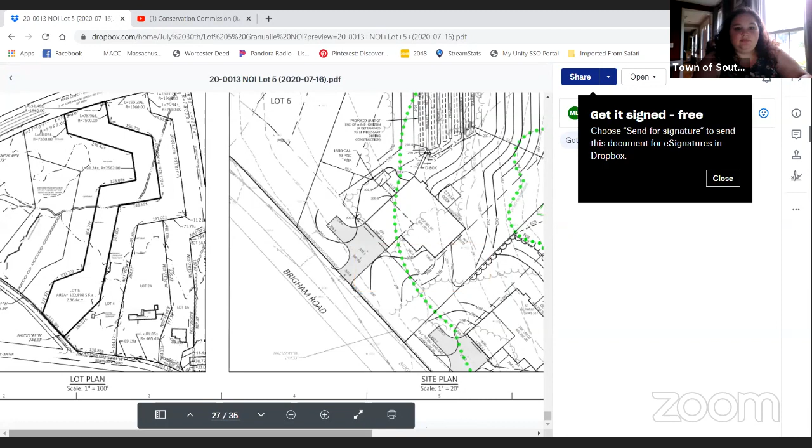I guess in the meantime, do the commissioners have any questions? This is kind of in line with the other two lots that we've been talking about.

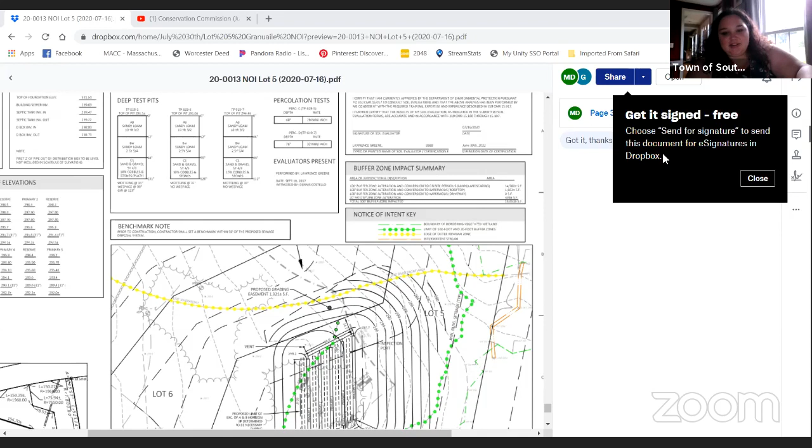While we're waiting for Wayne to unmute, Matt, do you want to give us some insight, update, and your review of this? So, as Melissa said, this is fairly consistent with the other two lots they've proposed. I did review it, had a few fairly minor comments.

Melissa, can you bring the plan up so we can see the site a little bit more? Yeah, that's better. And I don't know, I think they had submitted a revised plan. Is this the revised plan, Melissa, or is this the original plan? This might be the original one.

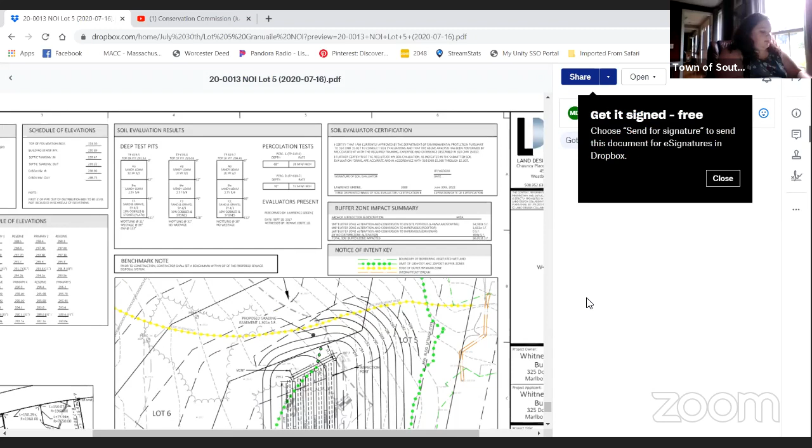Okay, so one of my comments was basically on the location of the septic system. And this doesn't seem to show it, so maybe this is a different one. They had the proposed leach field closer to the wetland boundary and the reserve area, yeah, that one, and the reserve area away from the wetland.

I guess my question was, could the reserve area be left closer to the wetland and basically undisturbed? I don't know, Russ, you can probably answer that better than I can - I don't know if the reserve area has to be cleared and graded, or if it can just be left. But that was one of my questions, was just kind of flip-flopping that to potentially allow pulling that disturbance away from the buffer zone, at least for the initial construction.

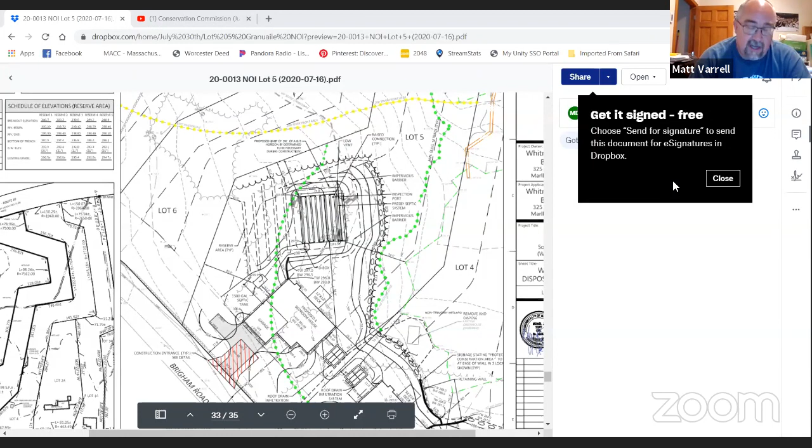They are proposing a roof drain infiltration system, like they added on some of the other lots. And I just had a comment asking for a detail on what the system was going to look like and any calculations as far as the sizing.

They are proposing, similar to the other lots, sort of a boulder wall to prevent lawn creep that's shown on the plan, but didn't really have a note calling out exactly what it was. So I thought, just to make sure everybody was on the same page, that it have a little note attached to it. That was about it.

There's no, as far as I know, no DEP file number yet for it. So we'd have to wait on that, and potentially some minor plan revisions based on my comments. So that was about it.

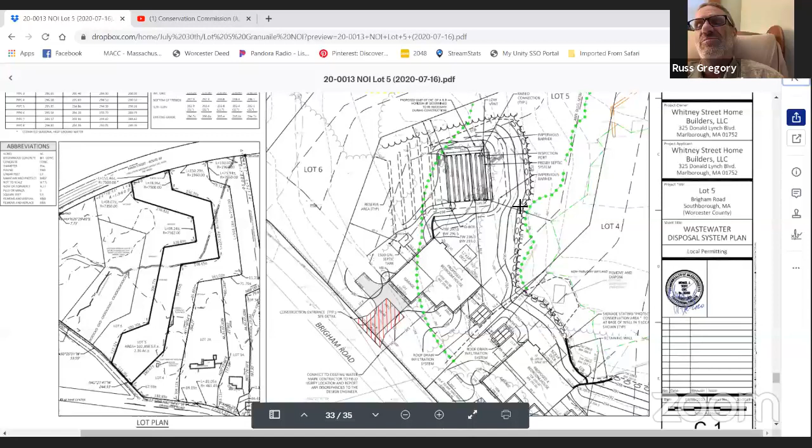So Matt, I'm not able to answer your question. I kind of suggest maybe we talk to the Board of Health and just throw that out there. Why can't we use the upland part first?

Yeah, that was my thought. It just seemed, why build it close to the wetland if you could build it further away? And if someday you need to build it closer, if it fails, then so be it. But, well, the other scenario as well is on a repair, sometimes you just have to dig it out and put it back where it was. So why can't we use the upland area?

I know I did get a DEP number this morning, but Wayne did have some edits to make, so he was asking to continue this until the next meeting, and that's one of the questions we can bring up that he can address in the meantime.

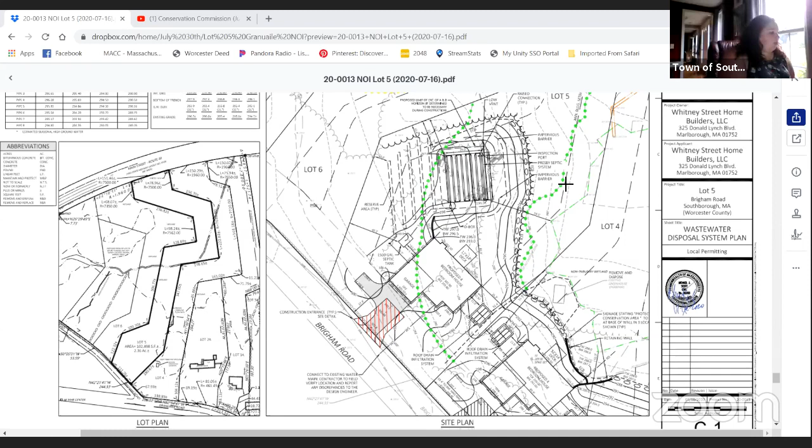Yeah, it looks like in the chat, he's unable to connect to audio for whatever reason. So, since we need to continue, why don't we just do that? If he can hear us, then hopefully he can take that note. If he can't, then let's make sure we get that feedback back to him.

All right, so do I hear a motion to continue? So moved. A second? Second.

Roll call vote, Melissa? Watson, yes. Smith, or sorry, Ben's not here. Pete, yes. Guyer, yes. Gregory, yes. Wittes, yes. Pasamato, yes.

Okay, this is 28 Granuaile Road. It's a continued notice of intent. In accordance with the Wetlands Protection Act, Mass General Laws, Chapter 131, Section 40, and the Southborough Wetlands Bylaw, Southborough Conservation Commission will conduct a public hearing on Thursday, July 30th, 2020 at 7 p.m. via virtual Zoom meeting. The commission will consider a notice of intent for a project located at 28 Granuaile, off Granuaile Road, previously part of 26 Granuaile Road, map 50, lot 51, for the applicant Whitney Street Home Builders, LLC. The project description is site grading, deck construction, and land restoration.

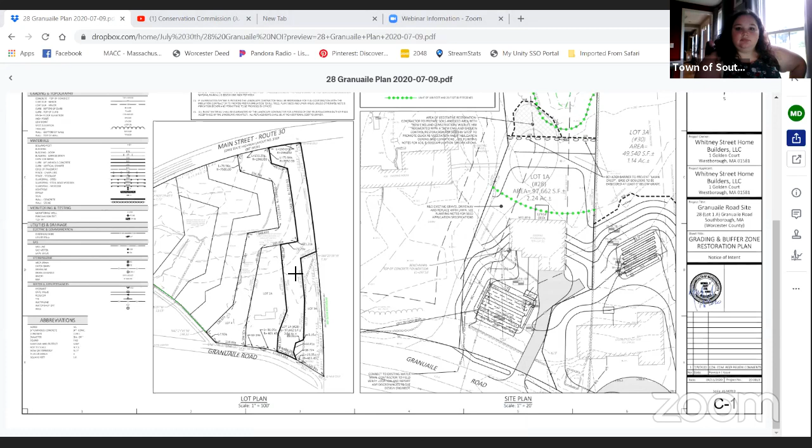So Wayne, I sent you a chat. It should have the number. You just gotta tell me what number to look out for. I think he had made a few edits before the last meeting on my comment, so it was really just the DEP file number.

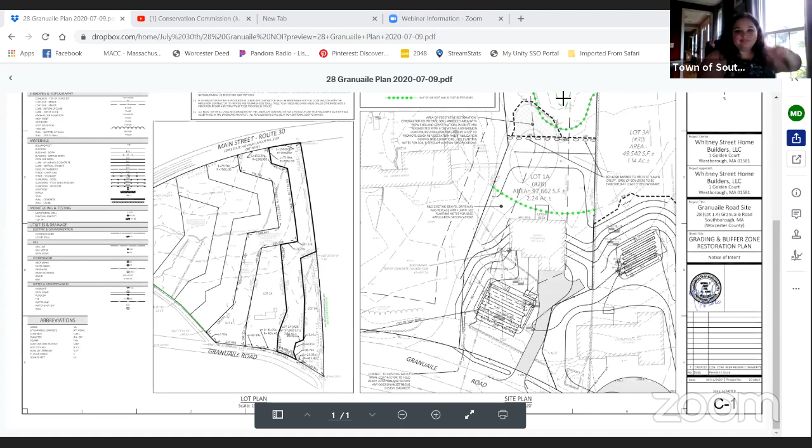Anybody else have any comments or questions about this application? It takes silence as a no. Is there anybody from the public that wants to comment on this? I don't see anyone. Don't see anybody? Okay.

Is there any reason we need to continue this? We can close this, can we? Nope. Okay, do I hear a motion to close this hearing for notice of intent application? So moved. Do I hear a second? Second. Roll call vote?

Watson, yes. Pete, yep. Geyer, yes. Gregory, yes. Wittes... he's on mute... yes, sorry. Possemato, yes. Okay.

Okay, next up is Lot 4, Granuaile Road. In accordance with Wetlands Protection Act, Mass General Law, Chapter 131, Section 40 and the Southborough Wetlands Bylaw, the Southborough Conservation Commission will conduct a public hearing on Thursday, July 30, 2020 at 7 p.m. by a virtual Zoom meeting. The commission will consider a notice of intent for a project located at Lot 4 off Granuaile Road, previously part of 26 Granuaile Road, map 50, lot 51, for the applicant Whitney Street Home Builders LLC. The project description is construction of a single family home, septic and associated improvements.

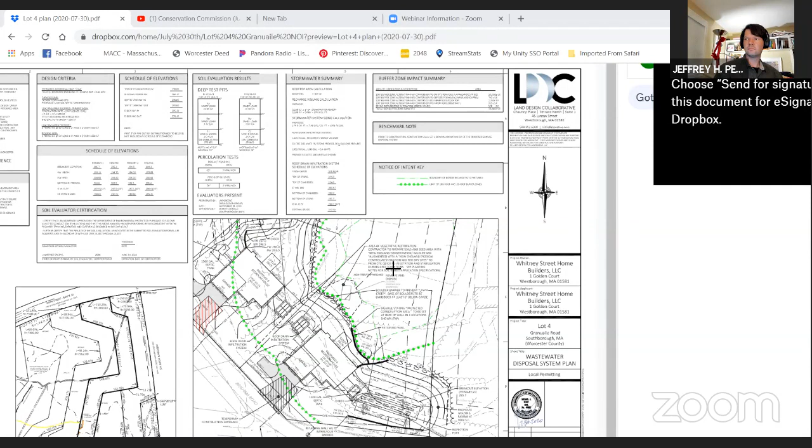Maybe zoom in on that stormwater summary at the top there. The lot 4 details file, I think, has more details. Yeah, so it's basically just demonstrating what they're proposing for the rooftop infiltration, which looked fine to me.

I don't think there was much else on this one, other than the DEP number again.

It looks like Wayne's connected by phone now, maybe. Sherry says the construction notes still say Westford. Is Wayne unable to speak? You're muted, Melissa. Is Wayne, can anybody hear you able to just speak? Yeah, no, there's too many things open. Wayne, can you put in the last 4 digits of your phone number? There's just a couple people on their phone. I want to make sure I let the right person talk.

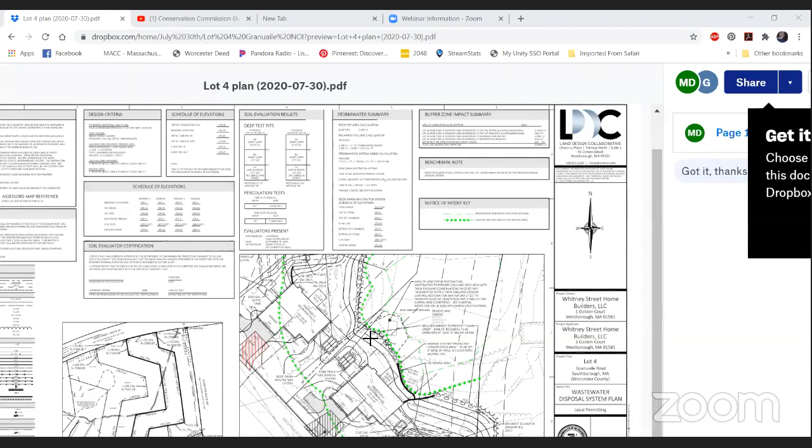Okay, so lot 4, I heard that Sherry had mentioned that Westford was still on the plan. Obviously, that's my bad. That's on the second page in the notes at the top on the details. So what I would ask, I think we've addressed the stormwater request, and in fact, that was part of the when we were doing lot 5, we looked to address it there as well. That table was already filled out, the detail was prepared, but never made it to the plan. When I opened it up today, I saw that and I kicked myself.

So with respect to Westford, obviously we're not in Westford. We've addressed the stormwater request. We do have the stormwater sizing on that first sheet, as Matt had called out, and the detail for that is on the second sheet, which is the detail sheet in the lower left-hand corner. It's a Cultec 180 recharger system that we're looking at. In this situation here would be a configuration of 6 units to give us the required volume to take the entire rooftop runoff. Again, that was basically it.

Ideally, if we could close the hearing and as one of the conditions modify that Westford call out, that would be ideal if everybody's happy with the stormwater system.

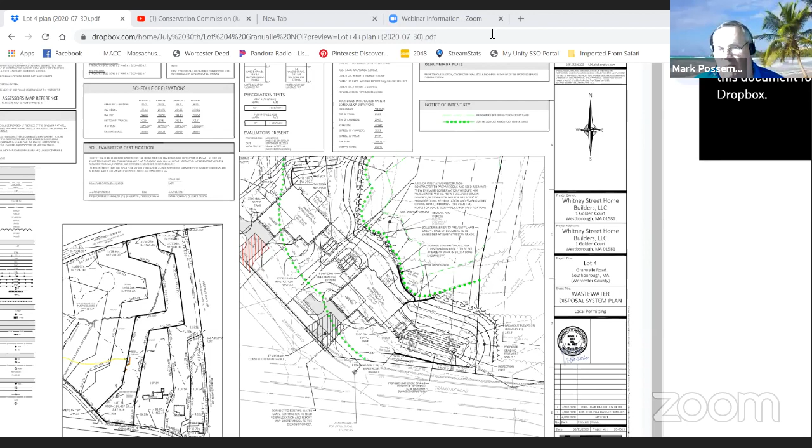So Wayne, procedurally, if you close the hearing, we can't take any new information in, even an edit like that. So we would need you to fix that and resubmit the plans, because they need to be stamped by a professional engineer and so forth and be accurate. That's just something that we typically don't waver on.

Mr. Chairman, I respect that. So, I mean, we can close this at the next hearing and wrap it up. Understood, understood. When do you folks meet again? August 20th, 3 weeks. Okay, it is what it is.

Okay, so that would be the only edit that we're looking at, is the change, the Westford note. Well, let me open up to the board and see if anybody else has any comments or edits that they have. So anybody on the board here have any other comments, edits, questions?

Nope, we're probably gonna be in this meeting for a while. I don't know if you can get a change in a stamp in the next 2 hours, or 3 or 4 or 12, however long it's gonna take. I could do that, we're going to try to move this along. Does that work for you folks or no? I'll do whatever the board, I would love to do that, but whatever works for the board. I'm sorry, that will work?

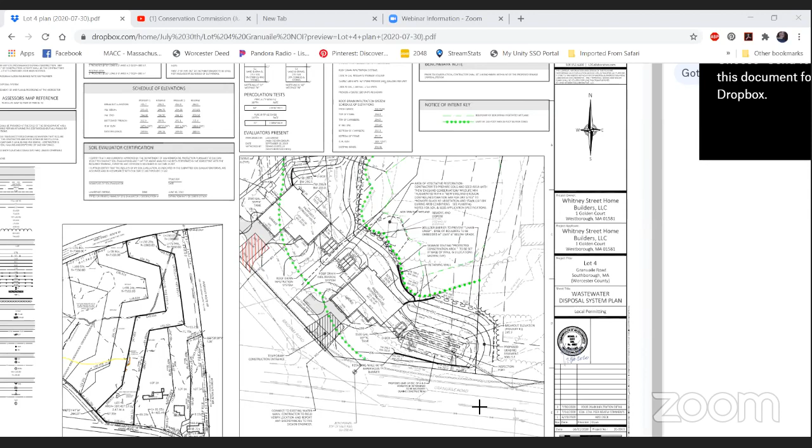Melissa? You're on mute, Melissa.

That's fine with me, it's up to you. I have no problem. If I see it by email, I can let you know and we can come back to it after we get through the other public hearings.

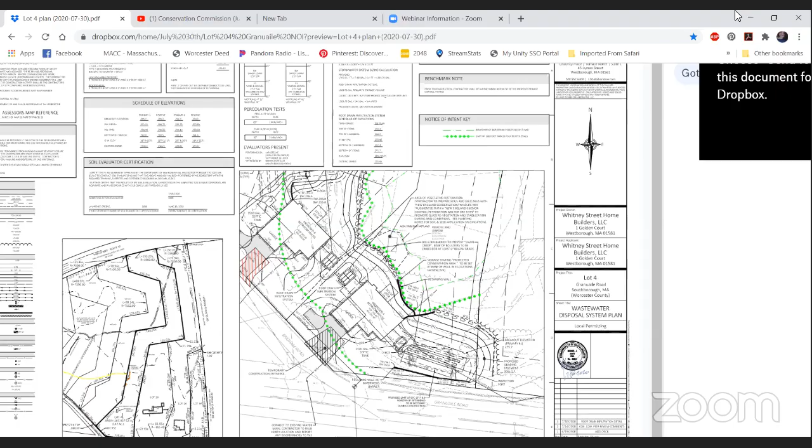Oh, you folks are wonderful. I'll head to the office and get that done. Okay, so we're going to leave this open and floating for now. Sounds great, I appreciate it, folks. You folks are wonderful. Okay, I will be back. You should have that within the hour. All right, well, sit tight just for one second.

Do we have anybody from the public with any comments or questions on this application? If anyone has questions, please use the raise hand feature and I'll allow you to talk. But right now I don't see anything. Okay, then we'll move on.

Thank you, folks, much appreciated. I will get that plan to Melissa shortly. Thank you, okay, bye-bye, drive safe, drive careful. He races to the office.

Okay, next up is 151 Middle Road. In accordance with the Wetlands Protection Act, Massachusetts General Laws Chapter 131 Section 40, and the Southborough Wetlands Bylaw, the Southborough Conservation Commission will conduct a public hearing on Thursday, July 30, 2020 at 7:10 p.m. via virtual Zoom meeting. The commission will consider a notice of intent for a project located at 151 Middle Road, map 28, lot 10, for the applicant 153 Middle Road Realty Trust. The project description is construction of a single-family home and associated site improvements. This will be a virtual meeting in accordance with the orders issued by the governor during the current state of emergency. There will be no in-person attendance by the public. Persons may attend and participate in the hearing by following the Zoom link at southboroughtown.com/remote meeting, and to review the meeting material.

Good evening, I believe I'm here, but I can't see you by video, and I've had success with this in the past, and I've tried to log on a couple of times, so I'm not sure what I'm doing wrong this time, but you'll just have to hear me. And you can hear me? We can hear you, and we know what you look like, so go right ahead. Thank you very much. I don't have a nice palm tree or the ocean moving behind me like you do.

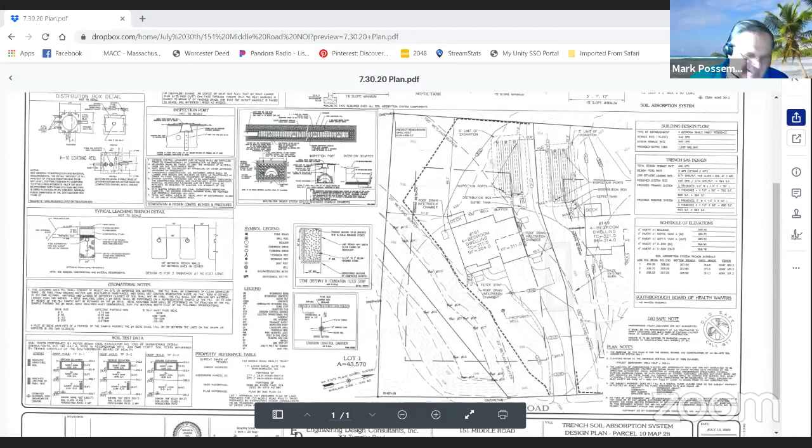Thank you, Melissa. So 151 Middle Road is the lot furthest to the south on Middle Road, as part of a subdivision we recently completed with the planning board. This is right at the trolley crossing, and I know the commission is familiar with the trolley crossing from the Leeds Way project we did for Mr. Bartolini a few years back. So this happens to be the piece that would be furthest to the east, where it connects to Middle Road, and the trolley line keeps going east from this point.

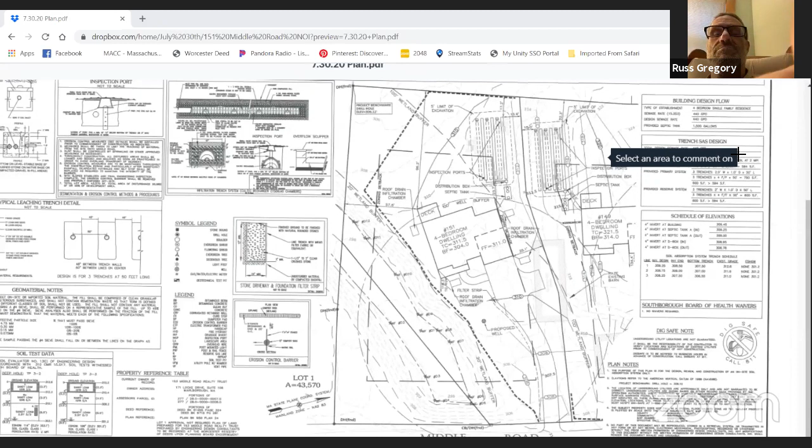We did flag the wetlands basically at the base of the old trolley tracks that went through there. The buffer zone is shown on the lot. We're proposing a 4-bedroom dwelling, also shown with a driveway coming in across the existing driveway that's there. There's a large barn to the right, straddling the lot line now, and the former Tanaholtz residence is located to the right of that, which actually falls on the next lot.

Soil absorption systems on this lot - very highly permeable soils, all gravels here. So we have basically 2-minute perc rates, no groundwater presence. The groundwater is actually associated with a wetland at the bottom of the trolley tracks, and that's about 16 feet, if not more, below grade from where we are on the site. So it's a fairly well-drained area.

We don't have town water here, so there's also a proposed well located in the front yard area. Leaching areas are outside the 100-foot buffer zone. Not a great deal of grading to create this residential lot here. The driveways are fairly uniform coming off of Middle Road. There is a low spot as part of our proposal, with a filter strip going in on the south side of the driveway to intercept water. We also added roof drain collection systems at the 4 corners of the house, which was added after we got Lucas Environmental's comments.

It was, I want to say yesterday, but I think that's when I got them. I may have gotten them the day before, but I apologize.

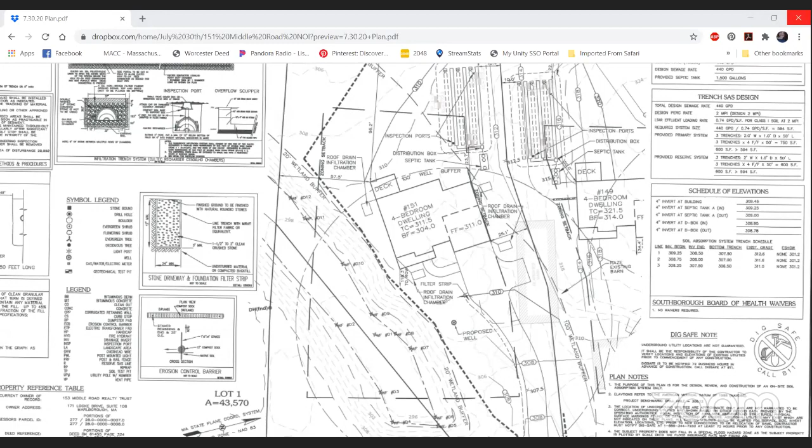So that's it, I'd be happy to answer any questions. Oh, we do have Board of Health approval too, by the way. So that's the other thing you should be aware of - that soil absorption system is approved.

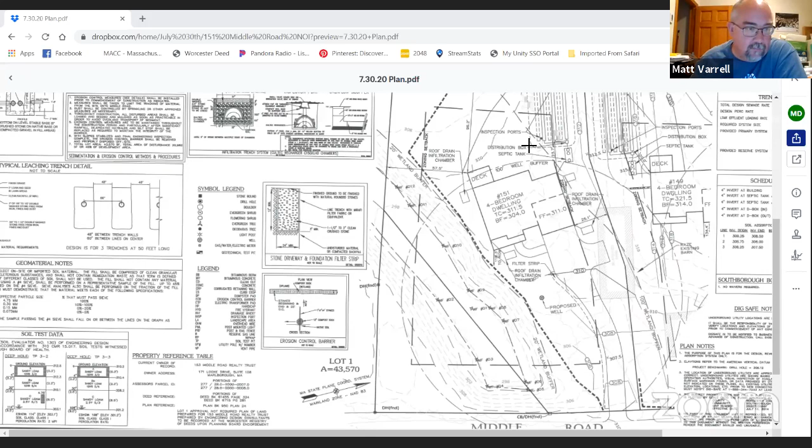Peter, will these all be cleared at the same time? No, I don't anticipate them going simultaneously, but I'll make sure there's proper erosion systems put in place, and we can do some check areas if they do multiple areas.

We made sure that we stayed below the threshold with the areas to ensure stormwater was protected, and that's why I thought it was prudent to put these roof drains in as well. Because once that roof goes on, you still have some unstabilized ground, so we'll make sure those go in right away.

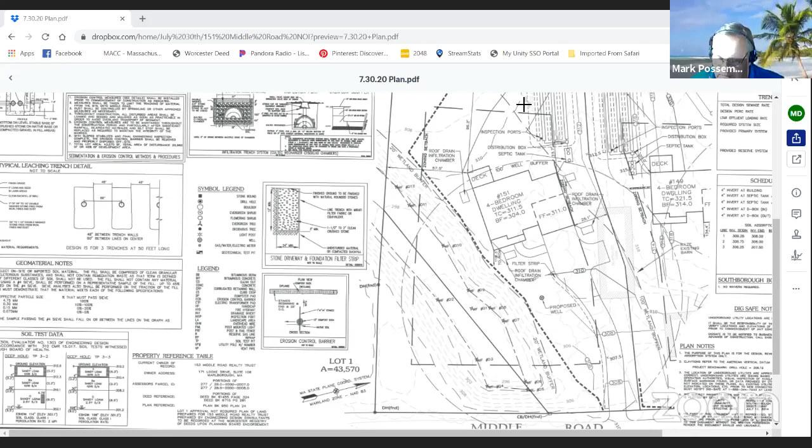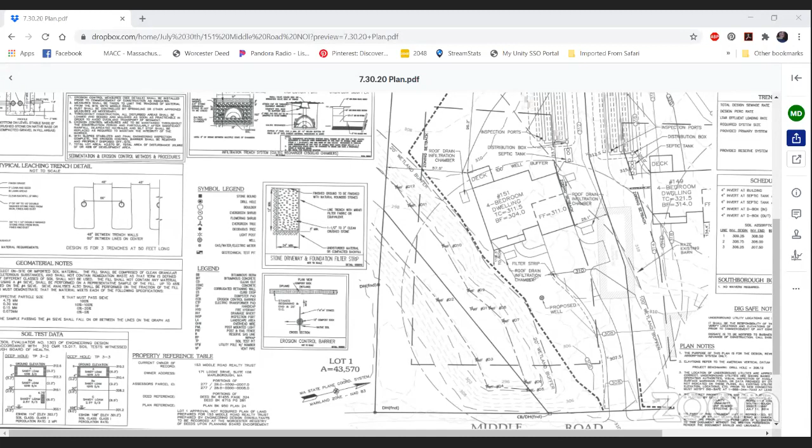Thank you all very much. Thank you, Peter. Before I go, I had put in a discussion item for 84 Main. If you're going to take that up later this evening because of your agenda, Melissa, would you mind calling me so I don't have to sit here all night? Or could you take me now? I don't know what your agenda's like, it seems as though it might be full. We've got three more scheduled hearings with time, so we have to get through those before we can pick that up. Okay, fine, very good. So Melissa, if you don't mind, I'll have my phone, I'll send you a text. Thanks much, okay, bye-bye.

Next on the agenda is the Sudbury Reservoir boat ramps. In accordance with the Wetlands Protection Act, Mass General Laws Chapter 131, Section 40, and the Southborough Wetlands Bylaw, the Southborough Conservation Commission will conduct a public hearing on Thursday, July 30, 2020, via virtual Zoom meeting. The commission will consider a notice of intent for a project located along Sudbury Reservoir, map 58, lot 2A, for the applicant, the Department of Conservation and Recreation. The project description is improvement of a boat launch at Framingham Road and East Main Street, and installation of a new boat ramp off Acre Bridge Road.

My name is Bill Moulton with DCR. Melissa, can you unmute phone extension 3720? That's the design engineer, Brian LaRochelle. From the last meeting, do you want me to go ahead, or do you want to? Oh no, I was just checking to make sure everyone can hear me. Okay, yep, you're good.

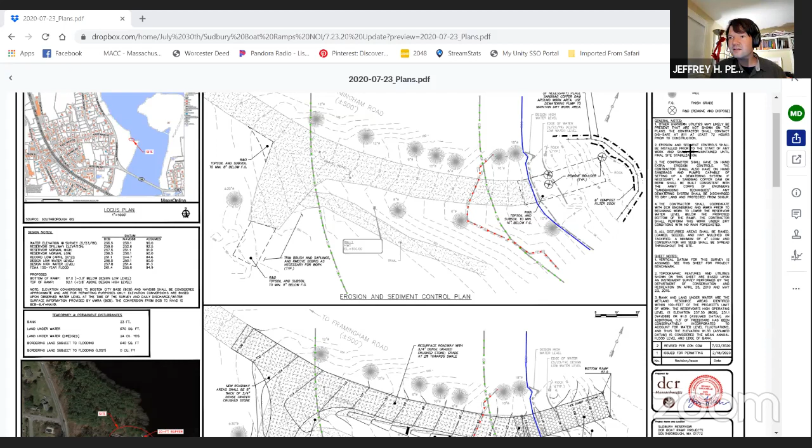Is there a new plan sheet or is it the same as last time? These have been revised. I think the date on them is the 23rd, under the 7/23 update folder on Dropbox. Ah, there's another folder hiding there. Gotcha. Thanks.

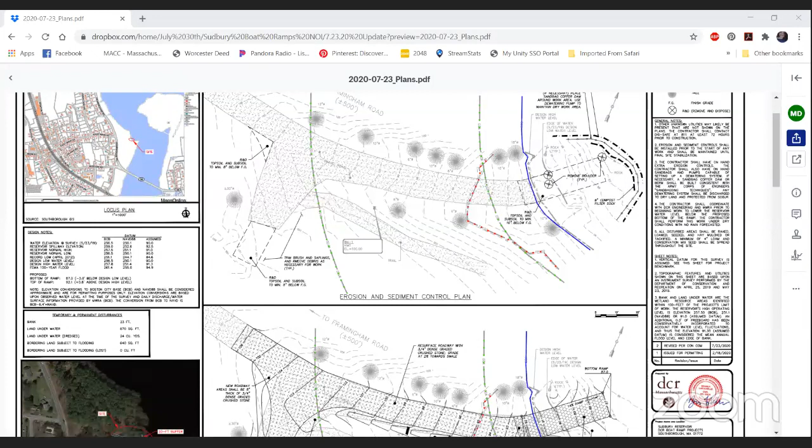So the changes have been pretty minor. For the first site, this is East Main Street, or off of East Main Street. The design is pretty much the same—we're just utilizing the existing gravel road that goes down to the water. We've changed the cover material of part of the turnaround; originally we were proposing dense grade, which compacts really tightly. Instead we're going to do a crushed stone, which will help us with meeting the peak rates in terms of the runoff through this area. So that was really the only change at this site on the plans.

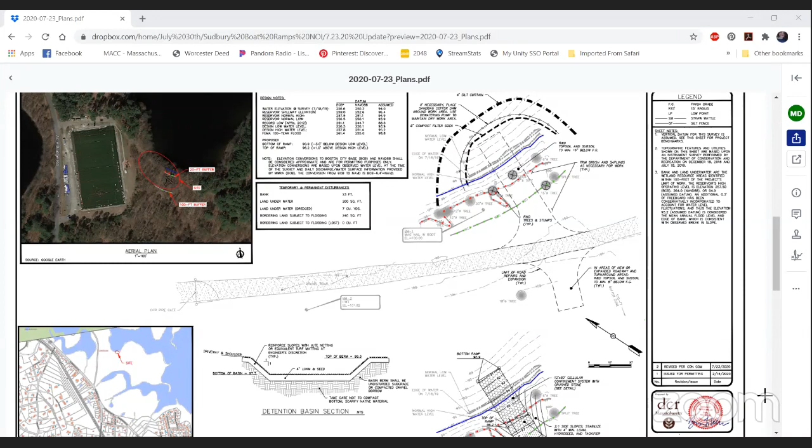The next sheet, the Acre Bridge Road site. We've eliminated, as Bill said, a bunch of the road improvement work from the gate to our proposed boat launch. The road is in pretty okay shape, I'll say. We certainly have some roads around the watershed that are in worse shape. So at this point, we're going to eliminate that from our proposed work. This boat ramp isn't going to see all that many boat trips, so we felt we could get by with the road as is. We've also shrunk down the size of the turnaround area directly opposite the boat ramp. The big change for this one was we added a small detention basin BMP, just to help us manage the stormwater and attenuate the peak flows from pre to post conditions. So those are pretty much the plan changes at this point. We've met the stormwater standards, and I'd be happy to take any questions you might have on the stormwater aspect.

Okay. Matt from Lucas Environmental, do you have any comments on the revisions? We didn't do any review on this. Oh, that's right. So no comments.

Did you actually provide us with your alternatives analysis in some written form? Yes, I did. And it basically follows the narrative you provided? Yes. Unless you have those.

Okay, yep, any other comments from board members? No. Judith? No, I thought you were gonna say something. No, I was just trying to say no. Okay, hard word.

Mr. Pete, did you have some comments? I thought you might be looking to say something. Nope, just looking at all the content, but it looks okay. It'd be nice to have Ben's perspective—I think he was the one pushing on the stormwater piece, but it sounds like that's been addressed. Yes, so, yeah.

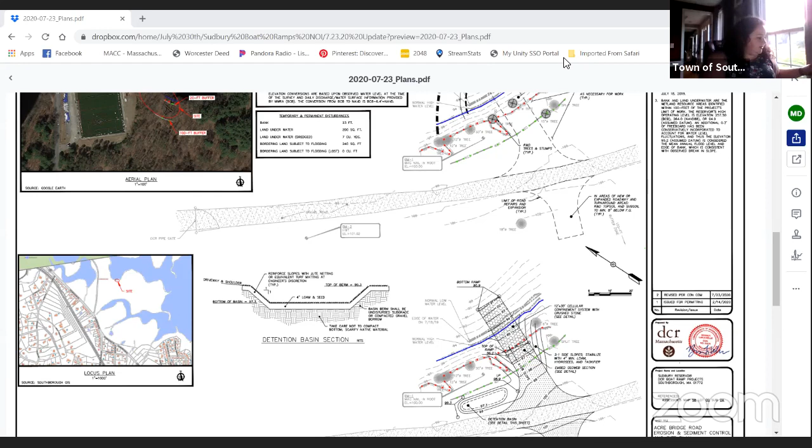No, actually the money was transferred before I filed with DEP electronically. I've talked to DEP's person who deals with this, and they worked very closely with our financial people, and the money was transferred, as I said, prior to me filing with DEP—I think it was like the day after I had filed with you. So I don't know what the hang-up is. In fact, we did get an email saying that the payment was, I guess, coded wrong or something, but the only email I got was that I would probably have my file number by the time of the meeting, and that was the first meeting. So I don't know what the hang-up is. I was hoping somebody would get back to me and find out what exactly the problem is. So.

All right, we'll have to continue it. Hopefully by 8:20 you'll have your number. I just checked, there was nothing there. I don't anticipate seeing it. I will keep checking, I'll keep emailing, trying to find out.

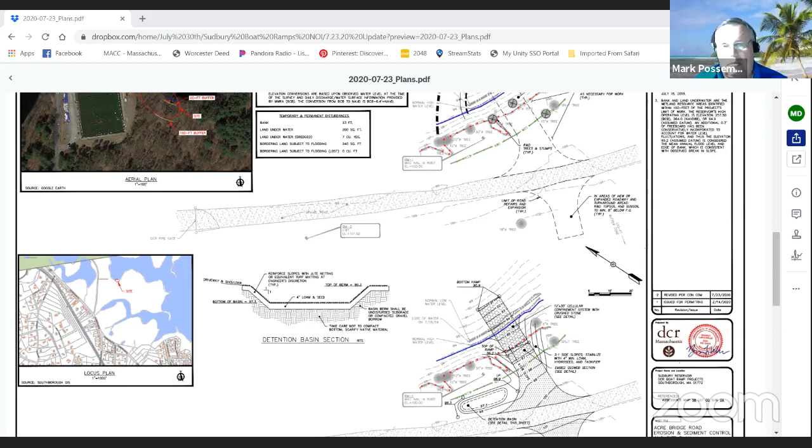Excuse me, Mr. Chairman. Do we know what the construction schedule is for this? It'd be nice to get it going based on the lower water levels at the moment.

Well, one thing we will probably do, and this is all based on staffing and the whole COVID situation, we were looking to do it in the fall. One reason is that if we lower the water level now, you'd have a lot of dead vegetation along the shoreline that would probably cause an odor issue. So that's the plan, plus there are other activities going on now with invasive species work. So at the current time, we were looking to do it in the fall to avoid odor issues for neighboring people.

It's really not too much of an issue for MWRA to drop the level of the water. We were going to have them drop it 5 to 6 feet, so we wouldn't be doing pretty much any work within the water, it would all be drained by then. We'll have our silt curtains and erosion controls up, but we wouldn't have to dewater.

We've got a chat entry here from Tom Gittens. He asks, will the public be able to put boats in now? The answer is no. These ramps are for emergency access to get out to the various islands and protect the watershed.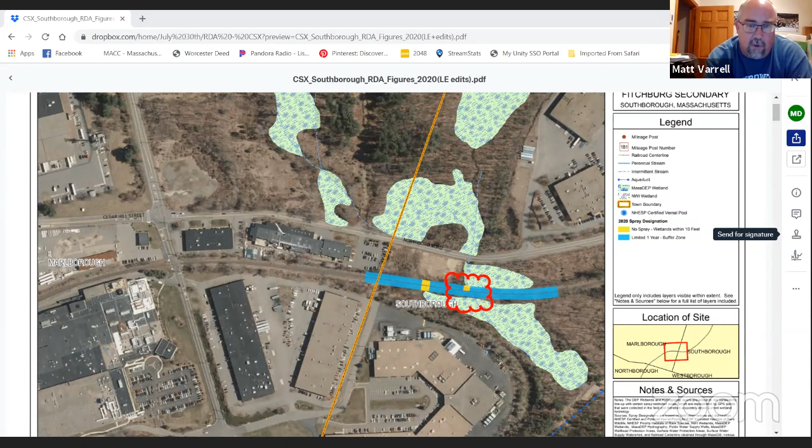I did send the plan that Melissa just brought up. I had highlighted a few areas here that I had questions on, why they weren't no-spray zones, because they generally look like where there was a stream channel probably culverted underneath the railroad. On this one, you can see the northern half appears as yellow, but the southern half doesn't, but I presume the culvert goes all the way underneath. Melissa can flip through those quickly, and I don't know if Mr. Herzog can comment on if that needs any correction or not.

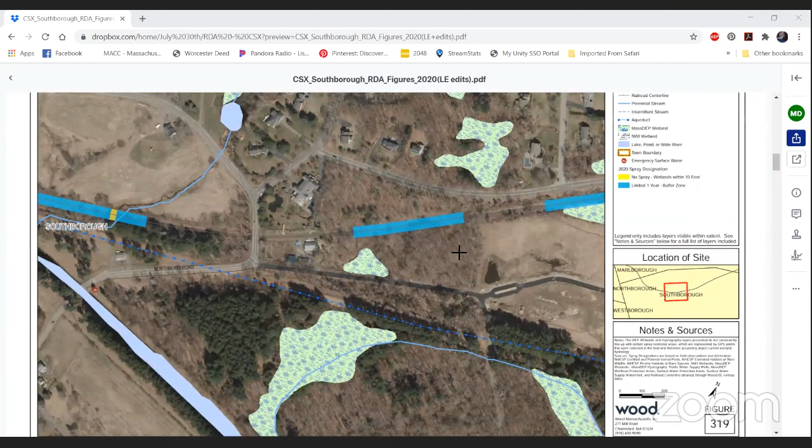Yes, certainly. All of these yellow no-spray zones, Chris and I together in 2017 walked and investigated, and I captured their locations with a handheld GPS. So what you are seeing on those maps, we've also overlain the Mass GIS, Mass DEP wetlands data layer, and that is based on air photo interpretation, so it's not quite accurate on the ground. It gives you a broad idea of where there are wetlands and streams. So in that first example you mentioned, it is a wetland and a culvert opening on the north side of the track within 10 feet of the railroad bed, the crushed stone on which the rail sits.

On the south side, the culvert opening and the wetland are greater than 10 feet from the road bed, so that's why it's not marked as a wetland and no-spray on that side. I looked at your markups, Melissa sent them to me, and it seems consistent in that regard, that the Mass DEP wetlands data layer might show an intermittent stream or wetland near the track, but actually on the ground, some of those areas you questioned are greater than 10 feet from the railroad bed. I hope that explains sufficiently.

Yeah, that's fine from my perspective, as long as the commission is good with that. I believe in some towns there's actually a field delineation required, and I don't know if this was ever delineated in the past or not, but I don't have any further comment.

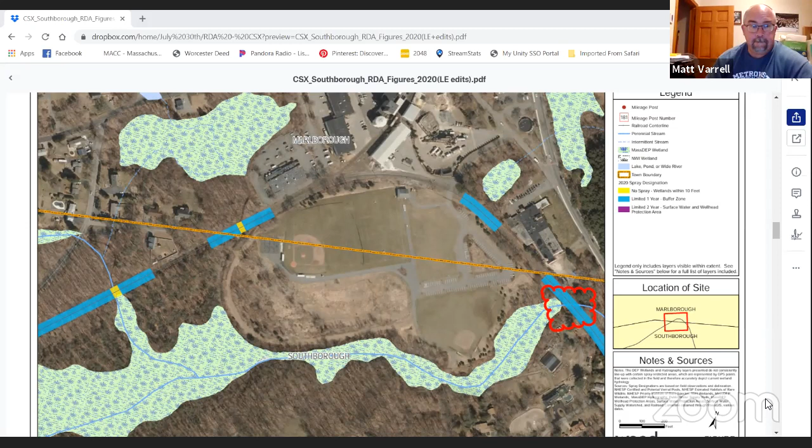Anything from the public, Melissa? No, okay, not seeing anything. So this was an RDA. Correct, so I think we move forward with a negative determination of applicability.

Okay, do I hear a motion to move that forward? So moved. Do I hear a second? Second. Roll call vote: Watson, yes. Pete, yep. Guyer, yes. Gregory, yes. Wittes, yes. Passamato, yes.

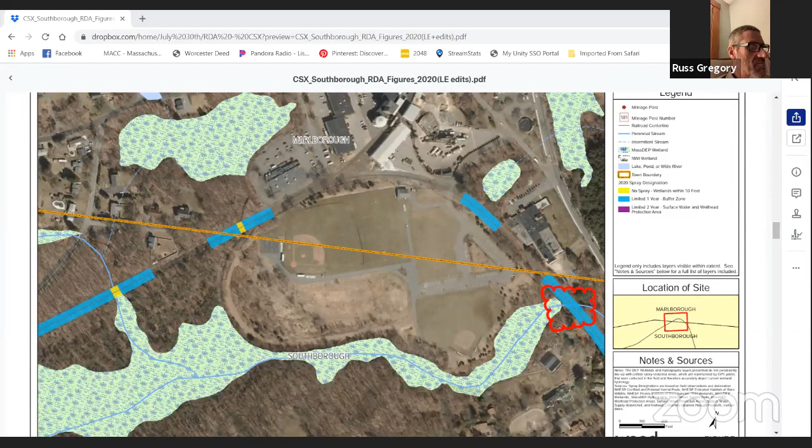Okay, next up we've got a continued notice of intent for Park Central, 0 Turnpike Road, map 33, 41, 24, 25, lots 4, 4A, 3, and 5. In accordance with the Wetlands Protection Act, Mass General Laws Chapter 131 Section 40, the Southborough Conservation Commission will conduct the continued public hearing on Thursday, July 30, 2020 at 7:35 p.m. The commission will consider the notice of intent filed by applicant and owner Capital Group Properties LLC for a project located at 0 Turnpike Road, Park Central. The project description is construction of a mixed residential development with wetland and stream crossing, stream restoration, and associated road work, stormwater utilities, and grading.

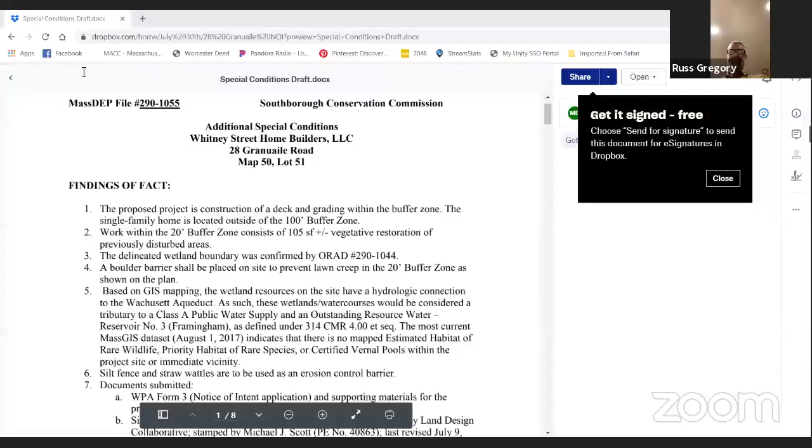Okay, so for 28 Granuaile, I'll pull up what I drafted. It's very straightforward, just talking about the deck and the grading. There is work within the 20-foot buffer zone to restore previously disturbed areas.

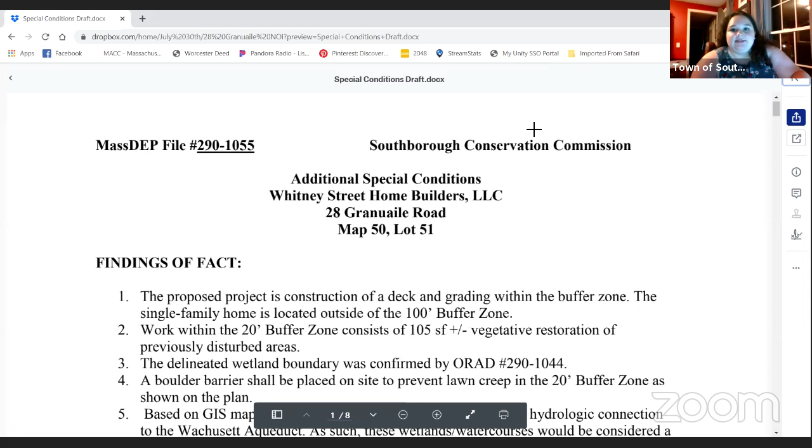And then about the boulder barrier. Do we have to issue a waiver for the work in the buffer zone? That can be part of the motion, yes. Although it is temporary, not permanent, we've allowed temporary impacts as long as they restore it, right? So it's when it's a permanent impact that requires a written waiver.

So many rules. It's never ending. All right, does anyone have anything to add or change? No.

So is there a motion to issue the order of conditions for 28 Granuaile Road? Do I hear a motion? So moved. Who was that? That was Sherry? Judith. Oh okay, Judith, second.

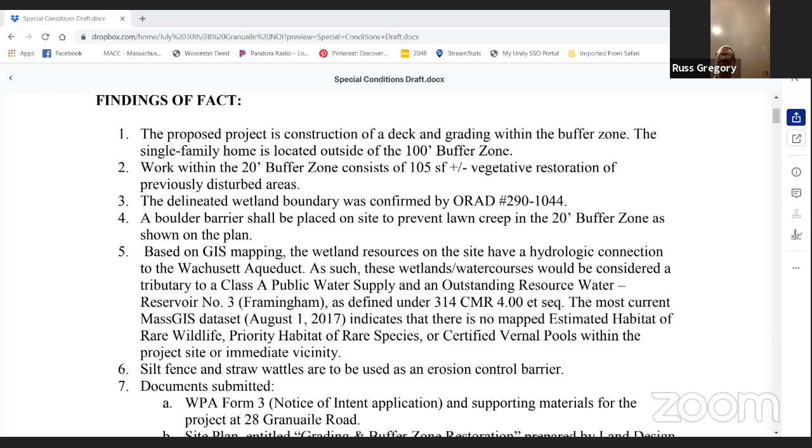Second, thank you. All right, Watson, yes. Pete, yep. Guyer, yes. Gregory, yes. Wittes, yep. Possemato, yes. Okay.

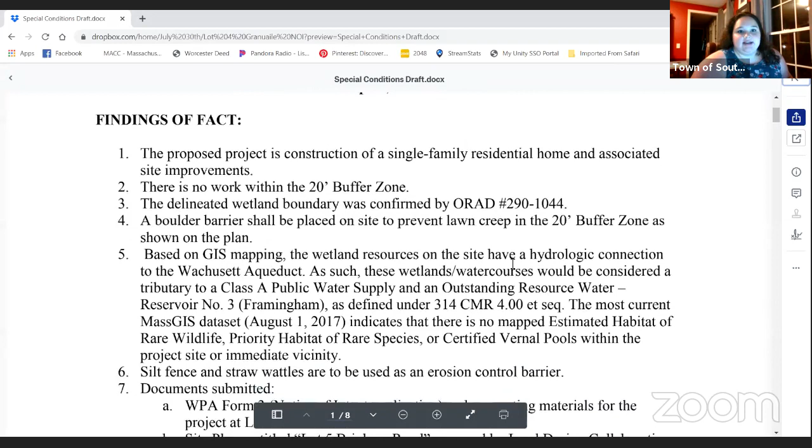And then lot 4 will look very much the same, except it's about a house, not just a deck, and there's no work within the 20. Right.

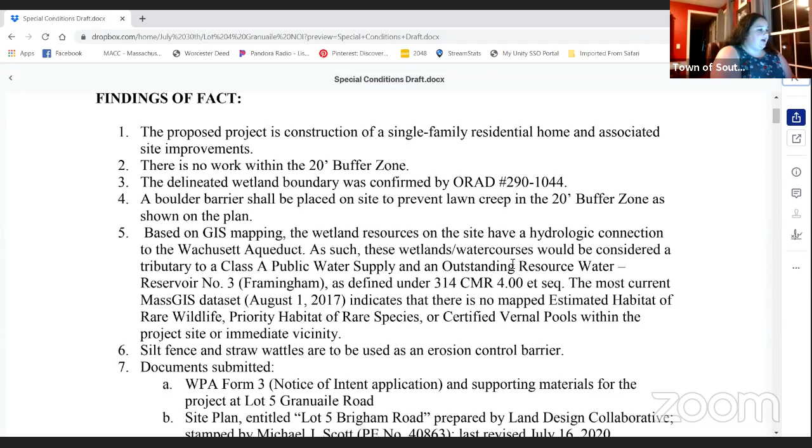Any edits or modifications from anybody? All right, do I hear a motion to accept these conditions for an order of conditions for lot 4 Granuaile Road? So moved. A second? Second. Roll call vote? Watson, yes. Pete, yep. Guyer, yes. Gregory, yep. Wittes, yep. Possemato, yes. Okay.

And then 151 Middle Road. The only thing with that one, I'd like them to put a double row of siltation barriers alongside the area that runs on an angle there, right along the trolley track edge, because that banking is very steep.

Okay, and down there next to Middle Road, Carl lives there, he probably lives down the street a little ways. He knows it's wet all year. Yeah, there's always water down there. Yeah, every time it rains, it sits water in there for a while.

We want to make sure there's no construction erosion going down there. They discussed a silt fence as a possible option, maybe with a compost sock along with it, to create a visible barrier. It needs a couple of things there, in my opinion.

Is there any further discussion about more stormwater features in terms of the rain garden, or was that concluded towards the end? I don't know, I can go either way on that one.

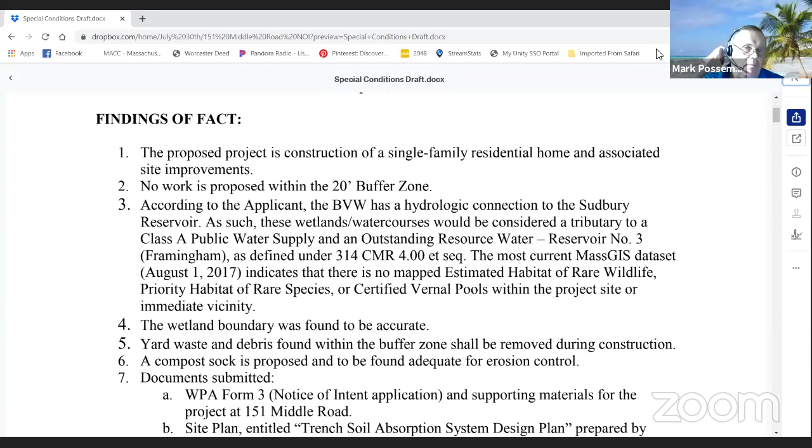I would just say that, as part of the order of conditions, the commission is accepting his offer to install a rain garden for stormwater management on the site. So a rain garden shall be installed at the appropriate location to manage stormwater on the site, with native plants, to be determined by design engineering, and then with final approval by the commission.

Or you. Okay, all right, I will add those in then. Okay, do I hear a motion? I'm gonna lose my laptop here in 5 minutes with a reboot.

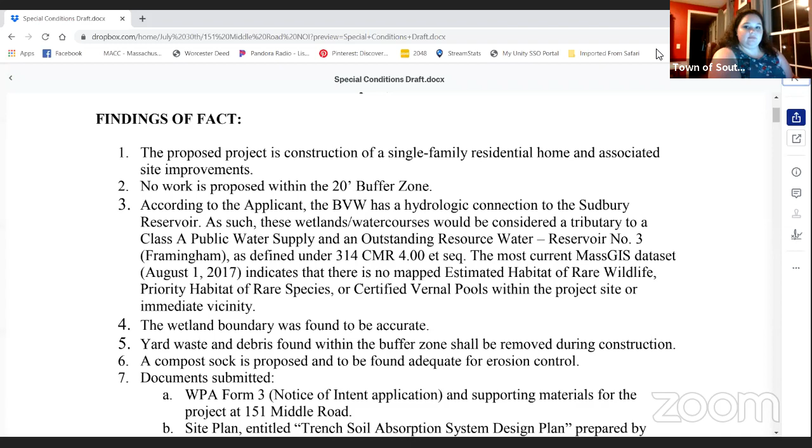So moved. That's with an update, Mark? Yeah, and it's not letting me postpone it anymore. Sherry moved, a second? Second. Watson, yes. Pete, yep. Guyer, yes. Gregory, yes. Wittes, yep.

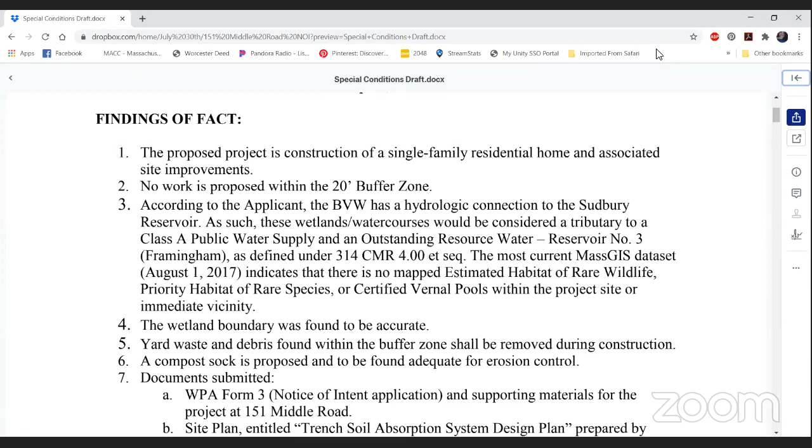Possemato, yes. All right, and just the very last thing is to ratify the emergency cert for 21 Stowe Road, which is failed septic. I've been asked to give a price on that job. So I shall recuse myself, I guess.

So that was an RDA to be filed and erosion controls shall be installed and approved prior to construction as denoted on the approved plan, which they submitted. That's been approved by Board of Health. So we just have to vote to ratify this? Yes, all right, just a roll call vote now.

Watson, yes. Pete, yep. Guyer, yes. Gregory, oh, you're abstaining. Wittes, yes. Possemato, yes. Trick question there, Melissa, huh? It throws me off, man. It was bad enough with Ben not being here.